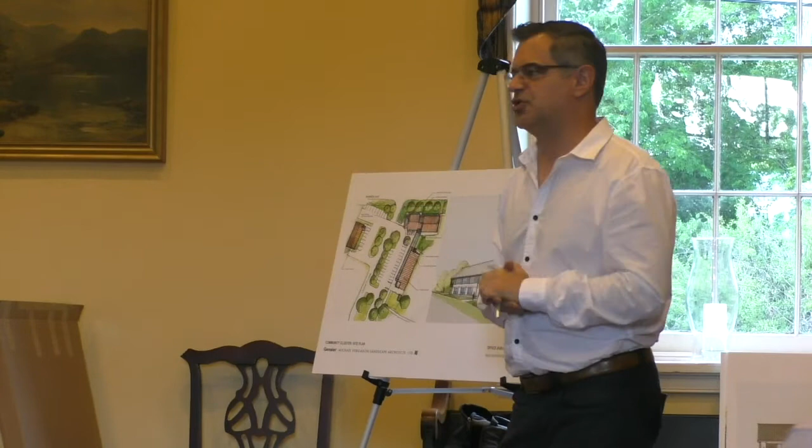Part of this building has a central lobby that comes in on the ground level. Being able to come into that lobby, have the required stairs and elevator access for ADA access and egress to and from the second floor, using that as a natural break and pulling it through the building allowed us to create a window element, which is in this zone here in the plan.

And that's where the staircase is. So that does two things. One, it allows us to celebrate that stair, let it reveal itself, and brings natural light in. It's a northern exposure, so it's great natural light coming in. And it breaks the facade, creating a reveal between the two portions.

So we end up getting a portion of the building here that's basically at that line we've been showing in our prior site plan. We're then stepping back to create that reveal I mentioned, which is the staircase leading to the second floor, and then just a little proud of that is this portion of the facade.

The other piece we started to look at is how we're articulating the different points of entry into this building. There's a retail component opportunity on the ground level, and a lobby entrance from the south side of the building. There's also an opportunity to recognize, as you come from 211 onto Warren Avenue and around, what do you see? How does this building present itself?

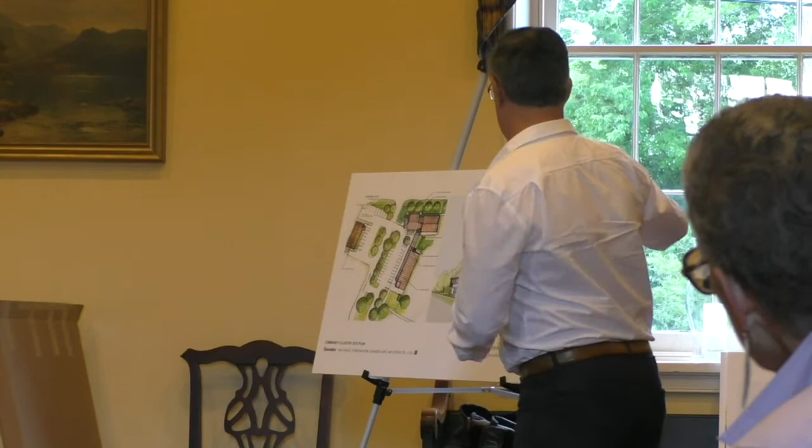So one of the things that really stuck out to us, if I go back to this one, is the two-story porch facade of the inn and the shop across the street. Patrick, I don't know the name of that building - what is it? The tavern. Okay, so we started to think about that as a way to celebrate the east side of the building here.

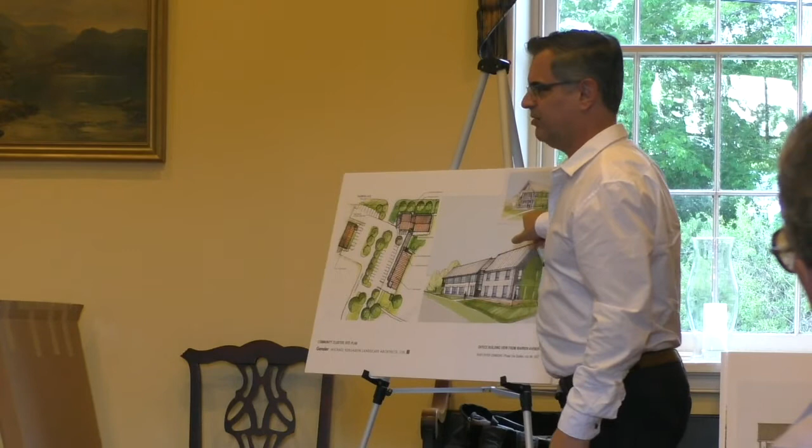So this does two things. One, it brings that vocabulary in, so you can see it as you come around Warren Avenue, and also as you go past and come up to the inn and the tavern building. On the second floor office building, it allows a chance for a little bit of outdoor breathing space for the tenant upstairs.

A couple things to point out, and you'll see this as we walk through: we have a covered walkway that goes from the lobby entry of the Warren Avenue building here on the south side, then works its way south and grabs the front of the food pantry building. It becomes a covered walkway that extends and unites the two buildings together. So I'm going to pull up...

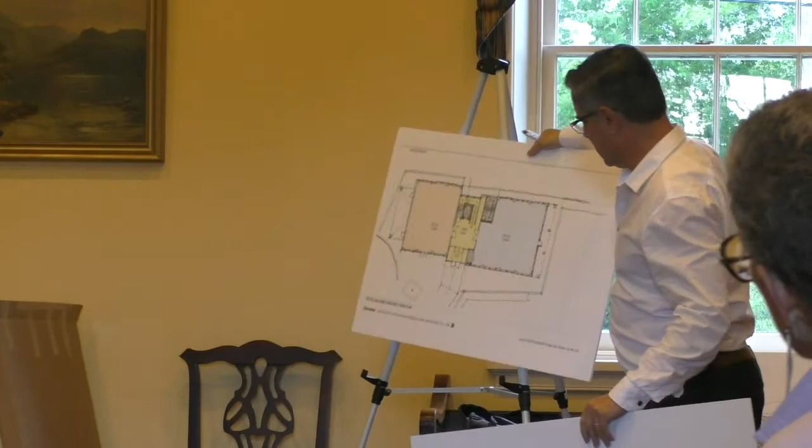So this is the plan of that building. As I mentioned, what we're doing here is a small retail space that you see here. There's a covered single-level porch on this side, facing to the west, towards Leggett Lane. It would also present itself, as you saw in the drawing, on the Warren Avenue side.

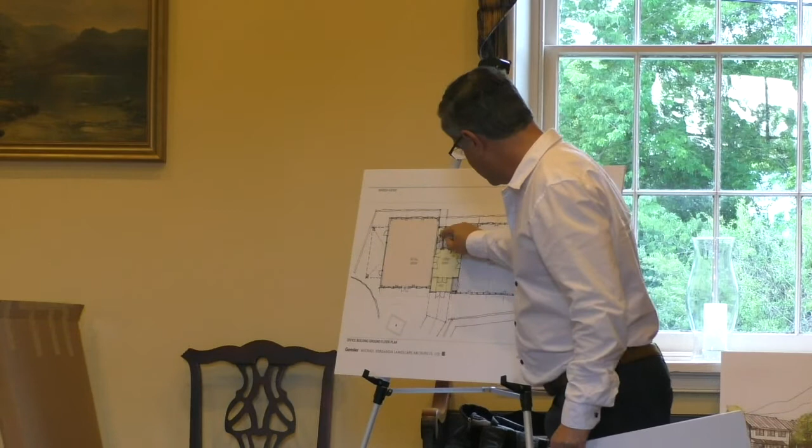The yellow zone here is that lobby that I mentioned. So that stair that comes in, we're able to do this, thinking through how we're resolving that facade. We're pulling the elevator in. The elevator is required to have ADA access to the second floor. We're able to pull that elevator in so it doesn't present itself as a dead wall portion to the Warren Avenue facade.

The stairs wrap around that. That's glass looking out to Warren Avenue. Then this becomes office space on that ground level. So this is that line that I mentioned. We're then pulling back here and then popping forward a little bit, but still back from the main line.

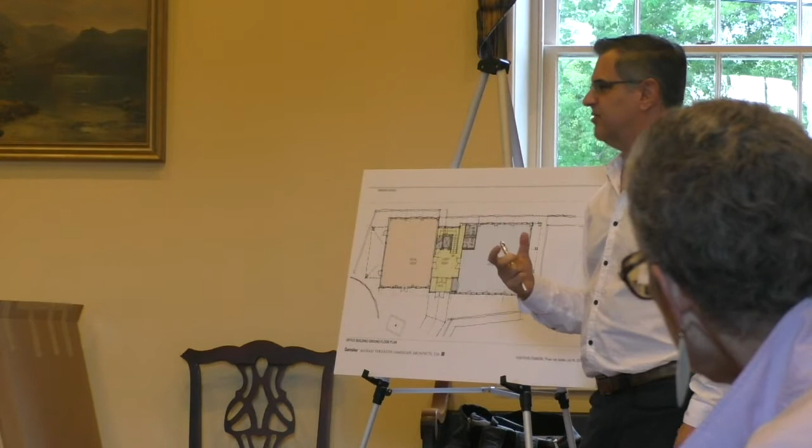So in the end, what we ended up doing is taking the majority of the facade facing Warren Avenue and pulling back from the street to create that undulation. This is that dashed line that you see as a covered entrance leading into the lobby.

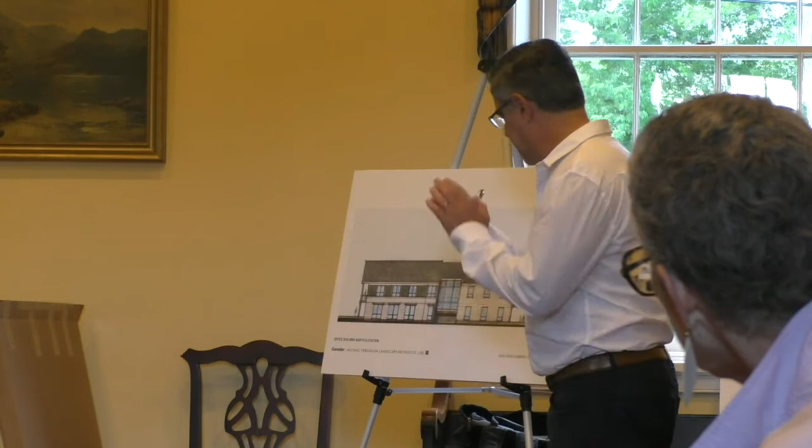So that Warren Avenue facade that we shared on Friday, if you look straight on from Warren Avenue at this, you're seeing this portion of the building clad in siding, and the windows have a clean aperture and a rhythm to that. The larger window acts as the reveal between the two portions of the building with the staircase going up, and then you see the windows of the first and second level of this portion of the building. There's a standing seam metal roof, the covered porch single level here, and the double level facing to the east.

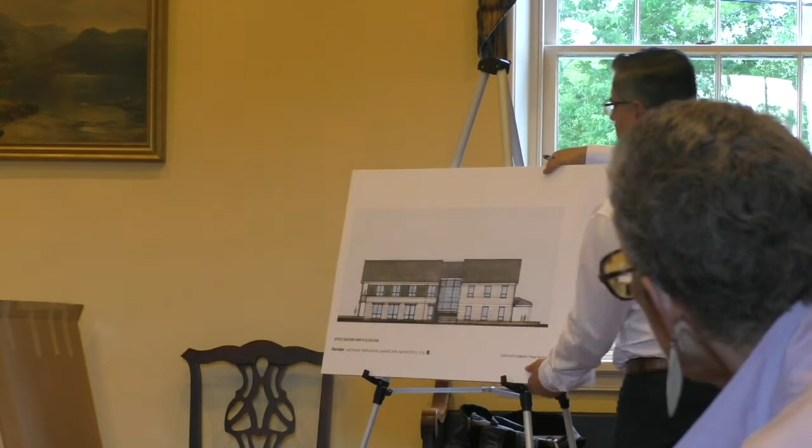So as we go over to the food pantry building, we've updated this sketch that many of you had seen prior. One of the things we looked at with the food pantry building is that it's really a single level building, but to work with the overall composition, we felt it was important to carry the covered walkway line all the way across. So that's what you're seeing here, a rhythm of columns that march across.

And then this facade, which is the west facade of the food pantry, is double in height. So what you're getting is a relationship between here and here. What does that do? It allows us to have a shed roof, a single slope roof in the food pantry, sloping from this point high in the west to lower on the east. So that eave line of that roof matches up with that eave line right there.

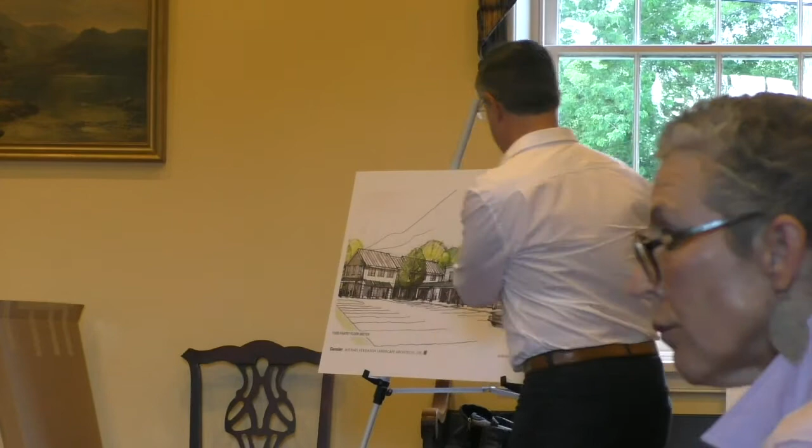It does a couple of things. One, this is clerestory light, higher light, natural light that comes in from the west into the food pantry. We talked with them and worked through how they're going to work their functional layout on the inside. They're going to have an open ceiling, so all the trusses would be exposed. That would bring natural light in and actually help reduce their utility bills because they'd be getting natural light to help light both their front of house space and their back of house space. Their main entry would be over here, and any loading they do would be on the south side of the building, so you really wouldn't see that on the Leggett Lane facade.

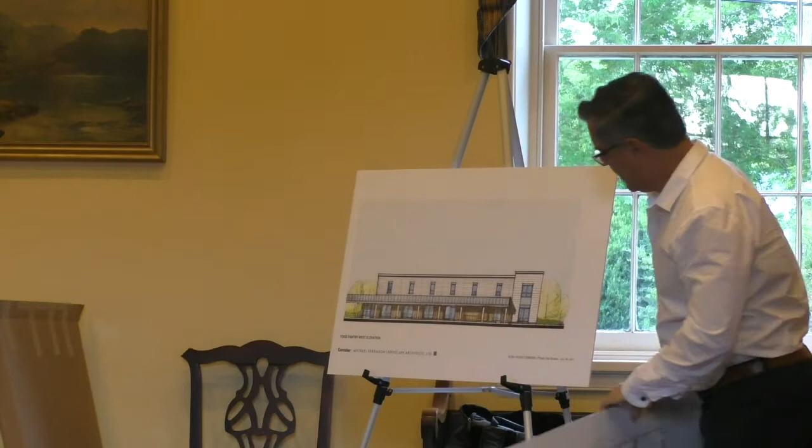So if we go and take a look at that in a little bit more detail, what you're seeing here is that facade. This is the standing seam metal roof coming across. It comes across from the lobby.

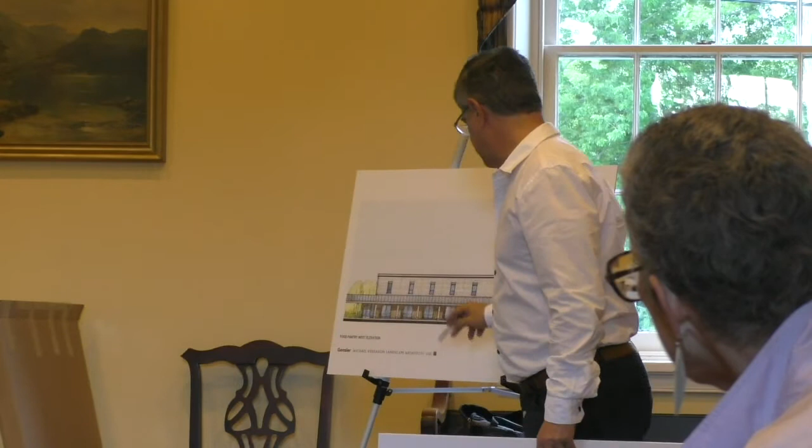By the way, one of the things this really does is it allows us, between the two buildings, the commercial building and the food pantry building, to have a little courtyard here and bring a little bit of greenscape, softscape in there between the two buildings, so they have some breathing space between them. This is the high clerestory lighting, natural light that I mentioned. There'll be entry doors here, a few windows in the facade, and then I'll also explain what this component is doing when you start to look at the plan of the building.

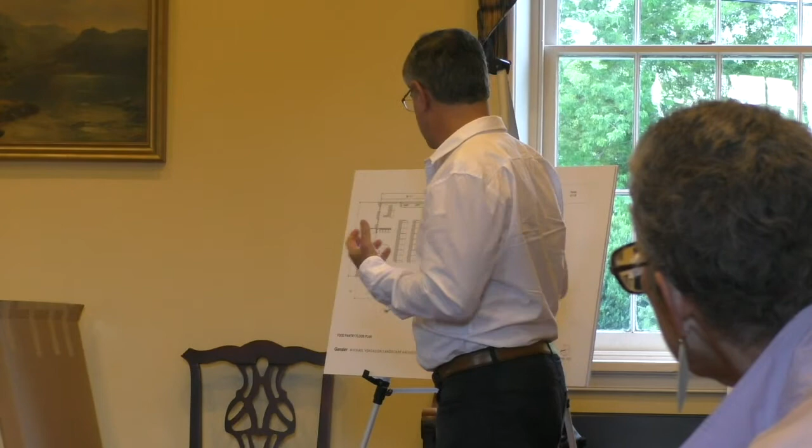And this is the latest layout that we worked with them on, studying their operations, talking through how they would move people in through this vestibule and front door, having two particular components that can be used during the day by the food pantry, but could also be open to additional community usage at night. One is this kitchen/break area, and then this conference area here. That's what you saw as this element in the facade drawing.

So before I jump into the residential cluster, any questions? I'll keep on cruising. Okay.

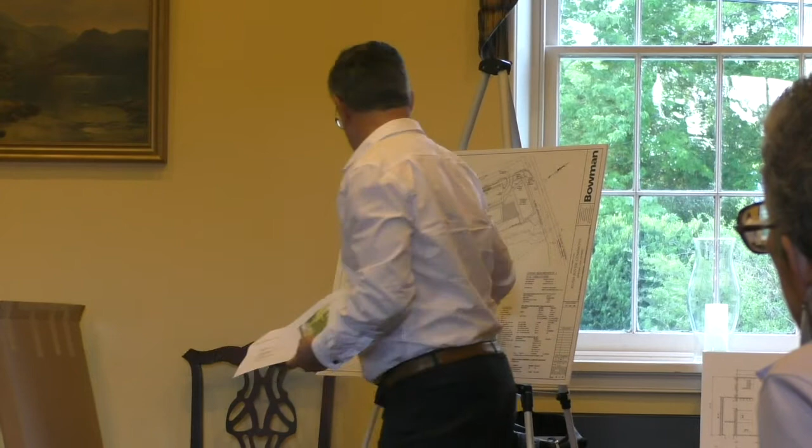So there's a drawing in your packet that I'm going to point you to on the board, which explains the residential layout. There's 20 units - how does this work? I'll point to this board here to clarify. So we have 3 buildings that make up the residential portion of this phase 1.

The first is these 8 two-story units, a series of townhomes. The way we set them up, there are 4 that are 2 bedrooms and 4 that are 3 bedrooms, however with the same footprint and plan. So depending on how usage is looked at in terms of who potential tenants are, you can mix that up with ease in terms of the floor plans. So they're very flexible, staying consistent for all of them.

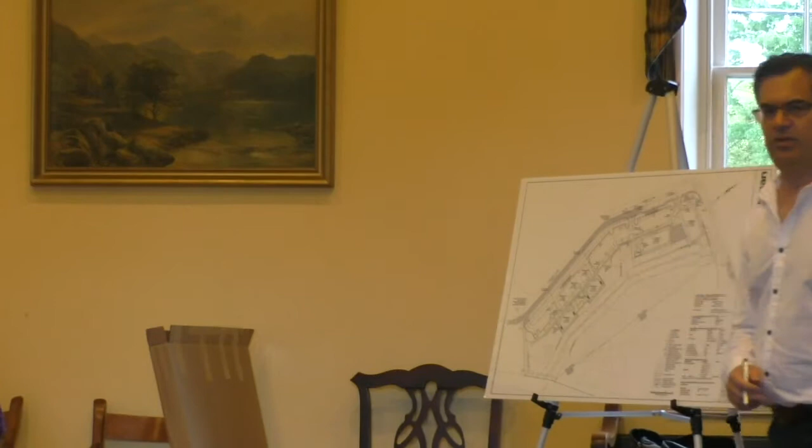What we've done, and I'll show you in greater detail in a few minutes, for these 2 buildings, is we're calling them basically 2 over 4. What does that mean? It's 2 two-bedroom units on top of 4 one-bedroom units, for both of those buildings. So basically 8, and you're getting 12 over here, so that's our 20 units total. 2 stories for this building, 2 stories for these units here.

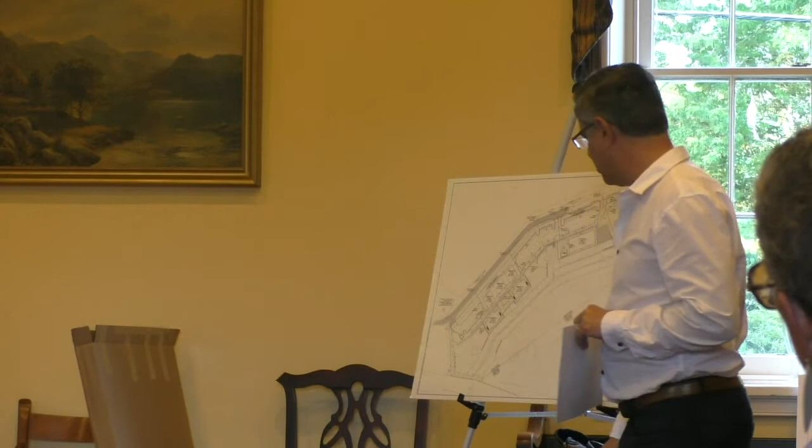What you're seeing right here, shown in light tan on the drawing in front of you, is a walkway. It connects over from the food pantry commercial building, comes down, and connects in front of these 8 townhomes and in front of these 2-over-4 buildings. Then there's a central green, which is a smaller courtyard that helps create a little bit of breathing space in these units as well.

So what do these units look like? For the cluster of the 8 townhomes, one of the things we looked at was to make sure we could set these up in a way that you're not seeing 8 separate units, all with big windows, just repetition.

So we started to group these in a way that this portion here and here pop forward a little bit towards that walkway, and this portion in the center, these 4 units, steps back. What does this do for us? It allows us to take that roof line, which is the same height all the way across, and get some differentiation between the 2 end units on either side and the 4 in the center.

The other thing we're doing here is creating an area where you have grouped entryways to the buildings. So the covered walkway that you would see here becomes a covered porch entryway here and then here. So basically you get a single porch approach on the front that unites those 2 entryways, rather than having 8 separate entryways.

Then when we come over here, you see a bay window condition on either side, and then a central bay here with a gable that comes off of that. What we're doing here allows us to get balcony conditions on either side, which creates a little bit more articulation in that center zone.

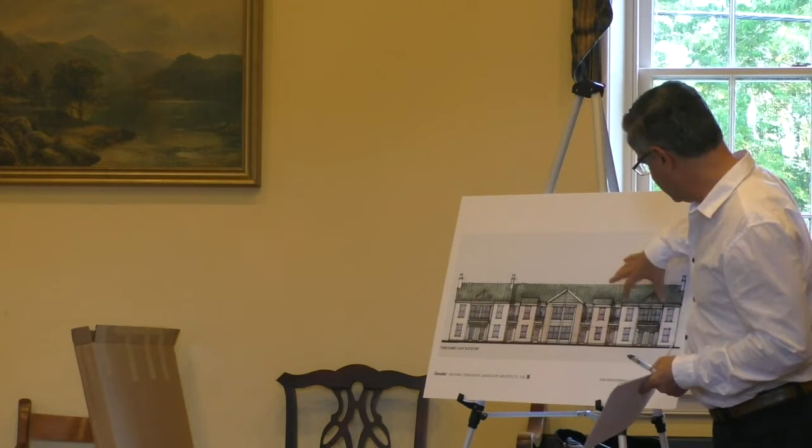What we're suggesting from a material standpoint in these sketches is that perhaps we're getting siding for the end units, and then potentially looking at brick for the center. That's certainly something we'll continue to study to see how that works out. From a window standpoint, just clean symmetrical orientation on the end units, and then again in the center.

One of the things we're looking at is being able to understand, recognize, and appreciate the different view opportunities, and also how that articulation helps with the scale of the buildings relative to the landscape around it, and then also ties itself to the townhome units across the way. I'll stop there and open it up for comments and questions.